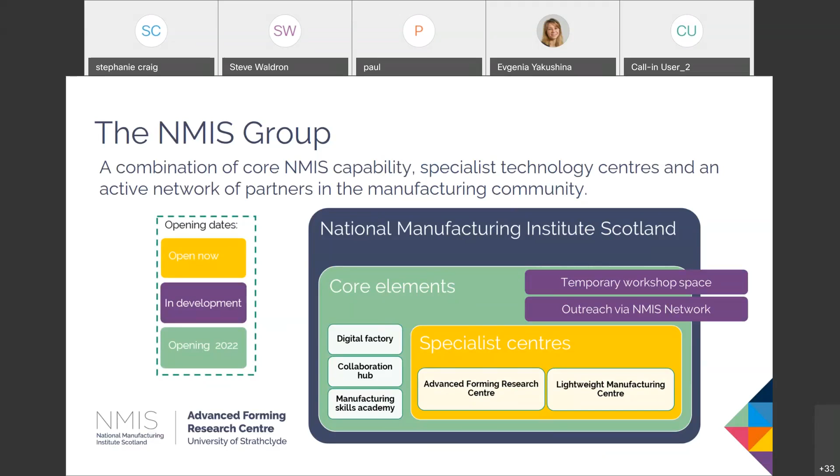In terms of the NMIS group, today you will be hearing from one of the specialist technology centres, the Advanced Forming Research Centre, which specialises in metal forming, forging and materials. There will also be other core elements of the NMIS once the building is operational in 2021/2022, including a digital factory, collaboration hub, and the Manufacturing Skills Academy. Of the specialist centres, two are already open: the aforementioned AFRC, and also the Lightweight Manufacturing Centre, specialising in lightweight materials and composites.

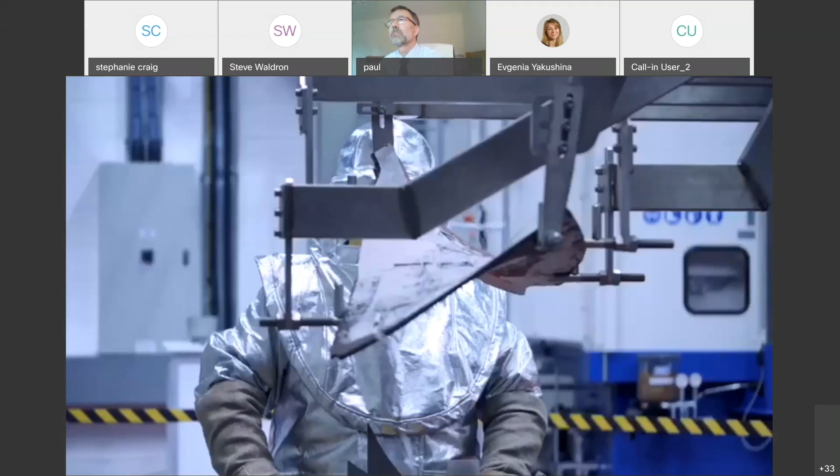Okay, thanks, Stephanie, and welcome everybody to our webinar on forming and indeed superplasticity. We thought we should start off with a bit of an introductory slide just about superplasticity itself.

So in terms of definitions, what is superplasticity? Well, it's an enhanced form of plasticity, as the name suggests, that we can obtain in certain materials deformed under some fairly closely controlled conditions. To put that into context, if you think of a reasonably ductile material like mild steel - if you took a rod of mild steel and put it into a tensile testing machine to see how far you could pull it before it broke, you would typically get somewhere between 20 to 30% extension. So that would be quite a high level of ductility.

In the case of a superplastic material, as you can see from some of the examples on the bottom right of the slide, we're actually an order of magnitude up, and we can get many hundreds of percent extension. Indeed, there may still be a world record for a bronze where they managed to get several thousand percent extension.

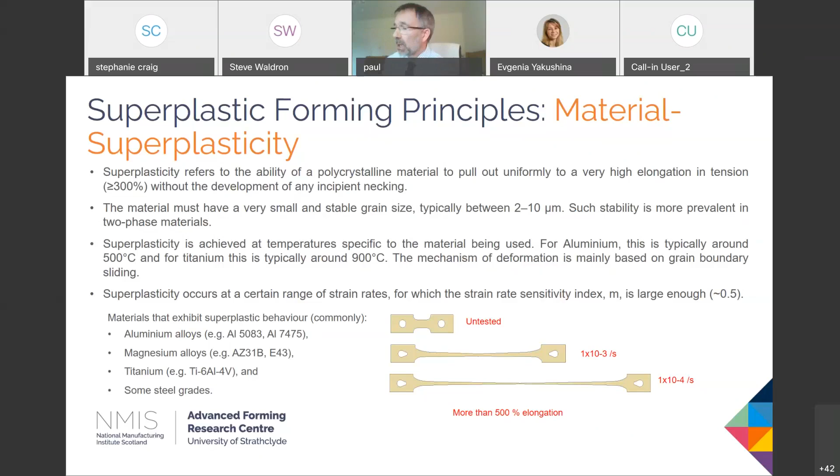If we can move to the next slide, Steph.

So the process itself, what does it involve? Well, this is a nice little set of schematics which walks you through it. To carry out a superplastic forming operation, you need to source your sheet, cut it to the appropriate size for the preform, and then the sheet is put into a press of a suitable type that has heating capability, and clamped between the tools. It's clamped so that it's gas tight, and then we form the sheet using gas pressure - in this country we'd be using argon - to blow the sheet into the shape of the tool, as demonstrated there. Now, if you've never come across superplastic forming before, this all sounds a bit unlikely - you can take a sheet of metal and blow it into shape just using gas pressure - but it is possible, and it's something we do a lot, and that is the nature of the superplastic forming operation.

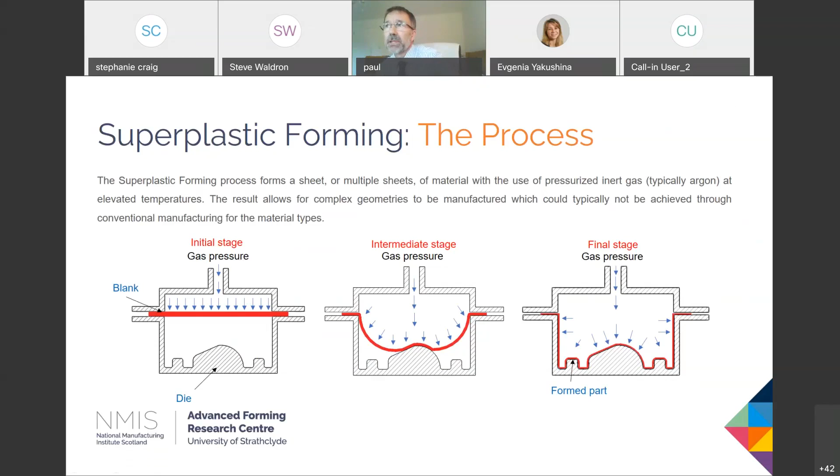Now, what we've shown you here is just a single sheet forming operation. If we jump to the next slide, there are variants of this. We can either use single sheets, or under some circumstances - this is done with titanium alloys - create parts using multiple sheets. There we take advantage of a process called diffusion bonding. So what we're showing in that bottom schematic is a 3-sheet part.

So let's say the 3 sheets of titanium 64 will have gone through a careful cleaning process to make sure the surfaces are nice and clean. Then we apply a bonding inhibitor, or more generally known as a stop-off material, that inhibits bonding in certain areas. That's important because we want those areas to later become the gas paths for when we subsequently inflate the part to form the shape you see on the right. So what we do is clean the sheets, apply the bonding inhibitor.

We then take that pack, heat it up to a fairly high temperature under mechanical pressure, and we have this process called diffusion bonding. Titanium is unusual as a metal in that it dissolves its oxide film. By holding the pack at high temperature under pressure, the material bond lines completely disappear. And if you do the process properly, you effectively end up with a monolithic piece of material.

We can then take that and put it into usually a different piece of equipment, an SPF press, and by pushing gas pressure into it, actually inflate it to give the shape you see there on the bottom right. That's called a Warren girder structure.

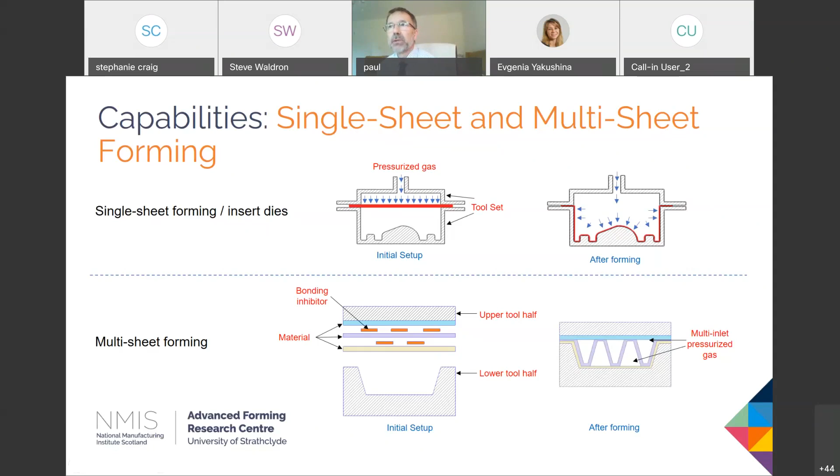Okay, so that's a little bit about the superplastic forming operation from a practical point of view. This slide attempts to sum up some of the advantages of the process. So why do we do it? Well, there are some alloys that just can't be formed cold, and titanium 64 would be a classical example of that. Its formability in a classical cold pressing operation is very limited indeed.

So using the superplastic forming process opens up a whole range of possibilities for alloys like that. But the other main advantage of the process is because the material is superplastic, it allows us to form complex near-net geometries. And the reason they are near-net is because we don't have any problems with springback.

Just in case you don't know what springback is, if you cold press a sheet, you bring the tools together, squeeze the metal into shape, and then as you pull the tools apart, the metal will spring due to its elasticity. That can be a problem, particularly with more complex parts, and it takes a little bit of designing against. It's not the easiest thing to do. In the case of superplastic forming, we don't get any springback, because essentially we're annealing the piece as we're forming it due to the relatively low forming speeds.

The second main advantage is because of this capability to form complex geometries, it can allow, under some circumstances, what may otherwise be quite complex fabricated assemblies with many separate parts to be redesigned as one part. There are many good examples, particularly from Boeing, where they've done that retrospectively, looked at part assemblies and said, actually, we can form this as just one SPF part and greatly reduce the part count. And of course, when each of those parts has needed its own tool set, the overall cost reduction can be very substantial.

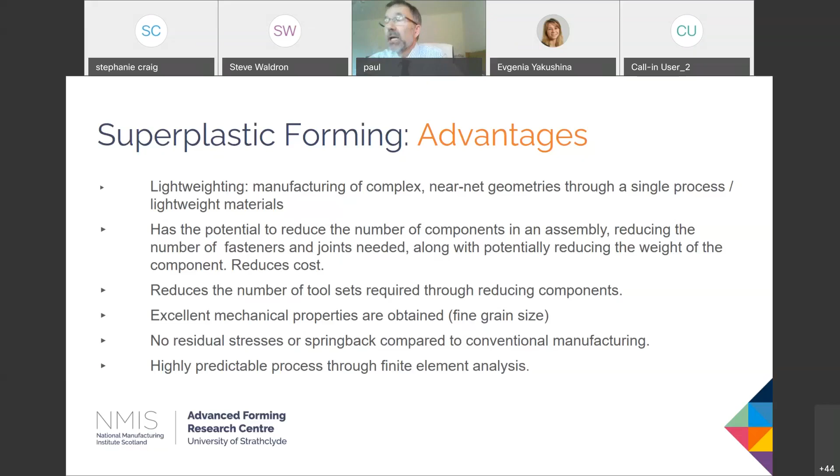Of course, it has its challenges, and any manufacturing process you care to think of will always have its challenges. The principal one is that it has reasonably long cycle times, certainly compared to many cold forming processes. For a single sheet part, typical forming times are perhaps around 30 minutes per part, but for more complex multi-sheet parts it can be several hours to manufacture. So superplastic forming is something of a niche thing, tending to be used in high value-add type applications, and we'll come to a few of those subsequently.

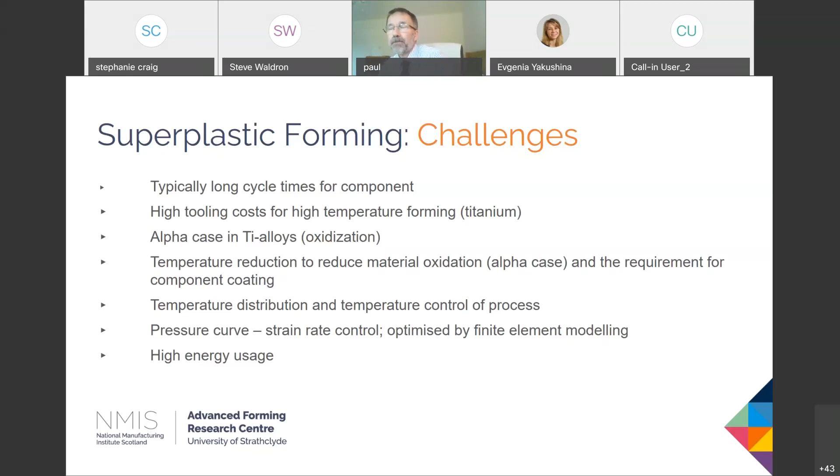If we can jump to the next slide, Steph.

One of the things we said we'd talk about was what's going on in the world of superplastic forming, what are the recent trends. The top two really relate to titanium alloys, probably the most difficult materials to form using superplastic forming in some senses. There's been a big push over the last few years to look at the use of ultrafine grain materials - classically Ti-64 processed using very careful rolling procedures to generate a grain size of less than 1 micron, very fine indeed.

Why would you bother doing that? Well, it gives you the opportunity, if interested in SPF of titanium, to either reduce the forming temperature or increase the forming rate. These are both good things, but most manufacturers would tend to want to reduce the forming temperature, because reducing it even by 50 degrees C, or better 100 degrees C - which is what these ultrafine grain materials do for you - you can greatly improve your tool life. So on a big production run, you don't need to take the tools out, clean them up, and put them back in so regularly.

So that's a big bonus. The other thing people have been looking at over the last few years - some of our colleagues at TIMET have spent a lot of time working in this area - is modifying the chemistry of titanium to reduce the SPF temperatures. We can now form a range of titanium alloys in the temperature range of 800 to 850 degrees C. A nice example would be Ti-54M.

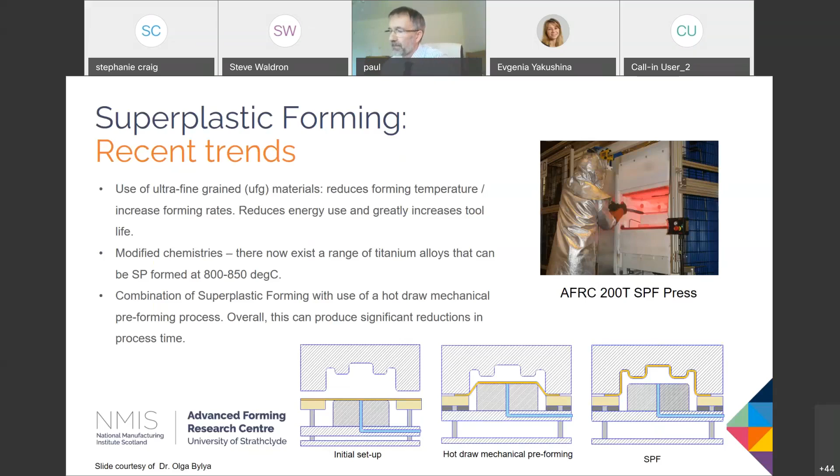If we jump to the next slide, Steph. Some applications - apologies on this slide, because we would have liked to show you lots of nice pictures of all these parts. Unfortunately, copyright rules don't allow us to pull pictures off websites and put them where we wish. But I'd draw your attention to the references at the bottom that will show you some very nice pictures of all these parts.

Aerospace - engines, I've already mentioned fan blades, the big blades right at the very front of the engine. They've long been made by companies like Rolls-Royce using superplastic forming, an SPF-DB process, because those are diffusion bonded as well. Guide vanes and various tanks are all made by superplastic forming, and indeed tanks for satellite launch vehicles have also been made by SPF in the past. On the actual aircraft itself, you see a range of examples there.

SPF is often used to make door panels of one type or another, simply because it gives you the opportunity to form what is otherwise a difficult-to-form material with the sort of detail required. A nice example at the bottom - slightly old one, I'll concede, back to 1991 - but it does give you an example of what can be done when you use the process properly.

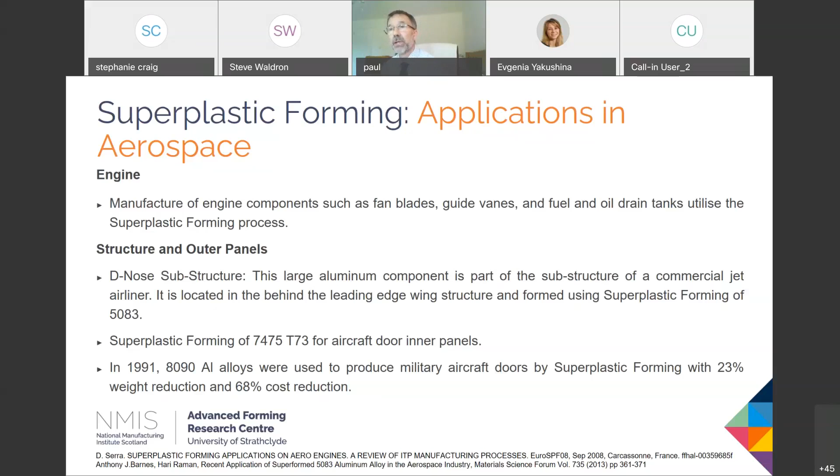8090 is an aluminium lithium alloy used to make a military aircraft door with a very significant weight saving, and a 68% cost reduction. So if you design for use with this process, you can really take advantage of it, and it needs to be done that way in order to get those sort of cost savings.

Moving to the next slide, some applications in automotive, mainly aluminium for automotive, and you see reference to companies like Superform and Alcoa there. The sort of cars this is used on, Bentley Continental GT, Mercedes AMG SLS, these are obviously top-end cars. What you see is that a lot of the external panels are made in aluminium using the SPF process.

Again, an example at the bottom there, just of a prototype where, using suitable design, you can end up using one part instead of three, which would be necessary using a conventional forming technique. There are secondary advantages if you design for SPF, reducing your part count, because normally a fabricated assembly will be riveted or welded together, and rivets and weld lines are areas where failures can occur, which are completely alleviated if you use a single part.

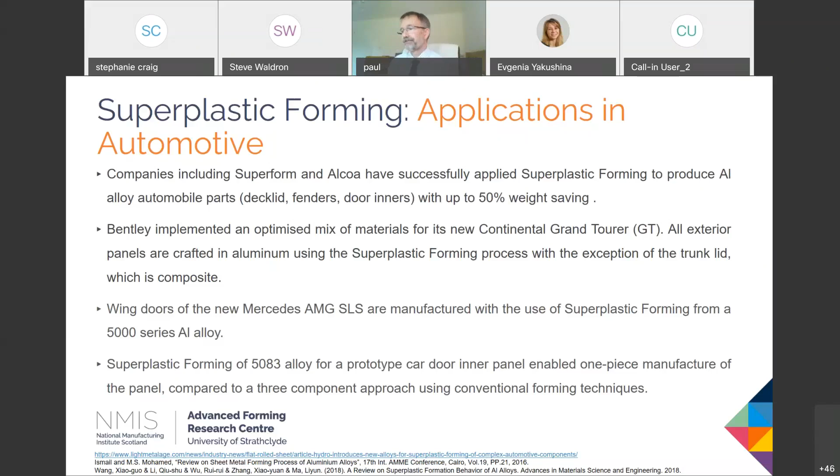Jump to the next slide, Steph. So this is the final one from me, and it tells a little bit about the story of the AFRC specifically, in terms of what we've done and where we are with the process.

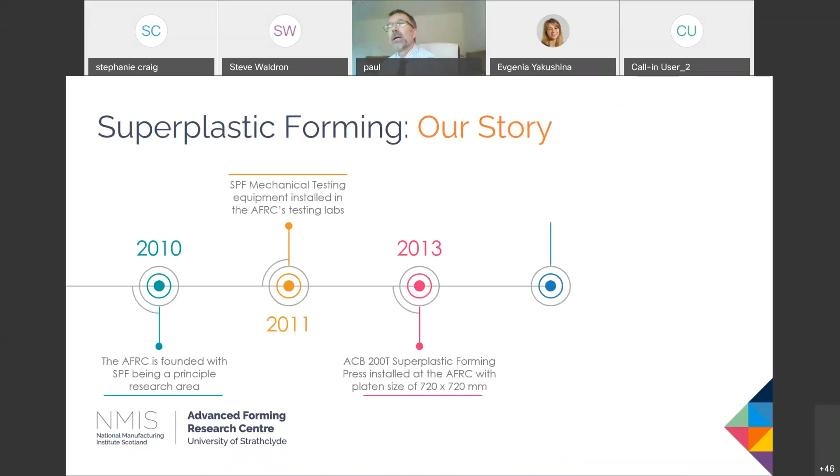We moved into our present building back in 2010. We're situated right next to Glasgow Airport, for those who aren't familiar with us. We very rapidly established an extensive set of mechanical testing equipment, so we can characterize the materials we're talking about here very fully. We also back that up with a very full set of metallography capability as well.

This is common to many universities, but what you wouldn't find in many universities is what we then acquired in 2013 and 2014. Initially a 200-ton press from ACB, a French company based in Nantes. Then the year after, the press you saw briefly in the video earlier on, a 1,200-ton Superplastic Forming press, with a platen size of 2.4 by 2 meters.

As far as I know, that is the biggest SPF press of any research establishment in the world. There may be one close to it in China. In fact, it's one of the biggest SPF presses in the UK, either inside or outside of a university. I'm aware that BAE Systems have got a slightly larger SPF press, but it certainly is a very substantial size press. So the point about this is we can do full scale forming operations.

Final point, in 2020 we had a bit of a think about the number of projects we've done over the years. We've worked with a whole range of customers on Superplasticity, both looking at it from a fundamental point of view and from a much more practical point of view. And we reckon over the years, we've done about £10 million worth of work across a whole range of projects.

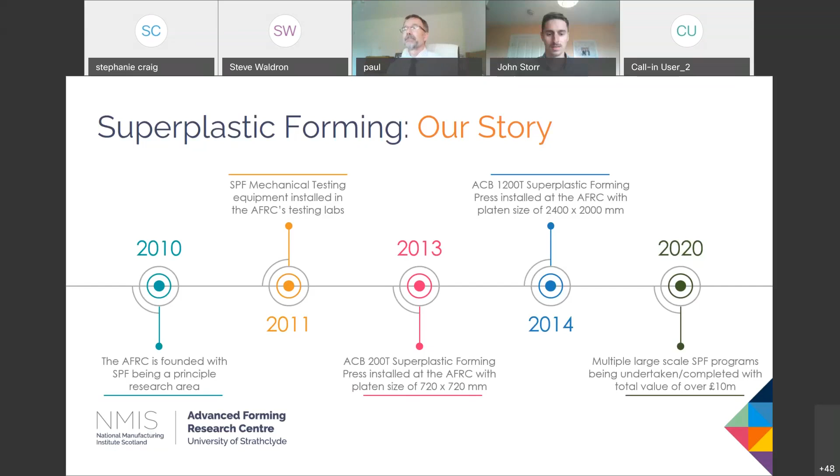Okay, thank you very much, Paul, and thanks for all your insights into the SPF process there. So where Paul has spoken a lot about the principles of the process, the capabilities, the advantages and challenges of SPF as a whole, I'm going to talk a little bit more about superplastic forming at the Advanced Forming Research Centre, what capabilities we have, how we benefit our customers, and some of the publications and work we've done in the past. Paul spoke a lot about the introduction of SPF, and left us with a slide on how the AFRC's story has been so far.

I'm going to just briefly go through some of our capabilities in-house. As Paul mentioned, one of the benefits we really have in SPF is the full-scale manufacturing equipment that you maybe wouldn't typically find in a university environment or a research centre in particular. The first piece of SPF full-scale equipment we received in the centre was our 200-ton superplastic forming press. As Paul mentioned, this is an ACB press.

This was installed in 2013. It has a platen size around 720 by 720 millimeters, and it's used typically to prove out process cycles, to look at new material implementation, and to look at different material structures and geometries that we want to investigate with different pressure cycles before we perhaps move on to apply those to the larger press that we have.

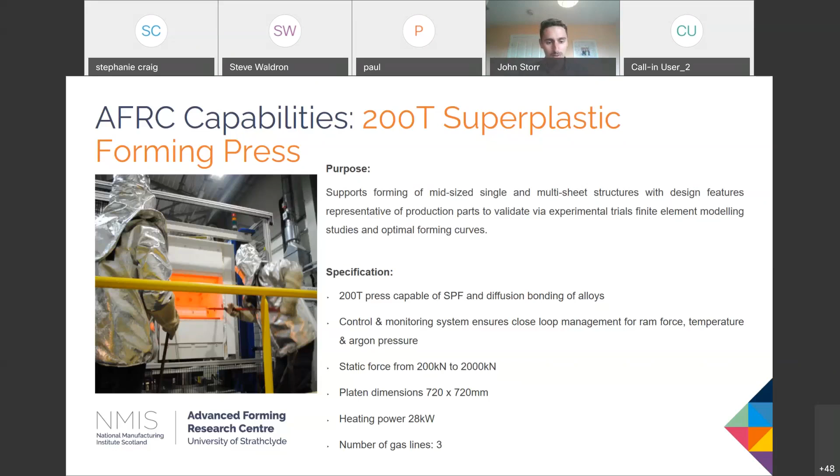We have our 1,200 ton superplastic forming press, which also has a unique capability of creep forming. Along with the 1,200 ton SPF capability, it also has 600 ton of creep forming capability. So not only using gas pressure to form components, but we can also just use the tonnage within the press to creep form thicker sheet components. We've done that with some thicker sheet titanium components in the past as well.

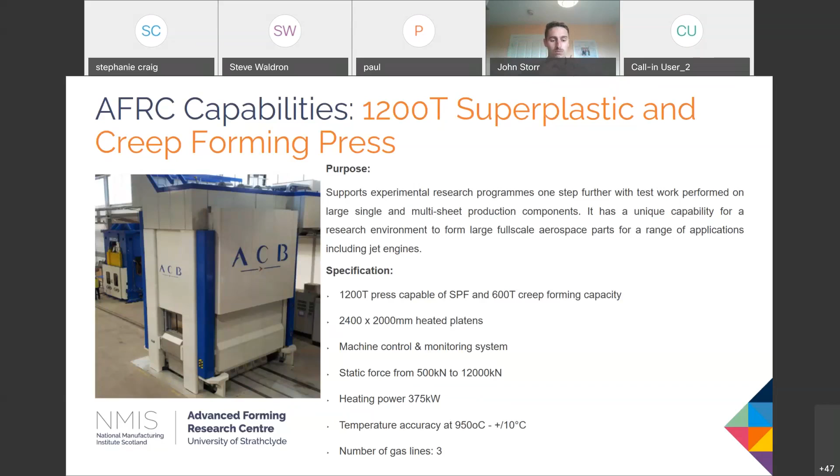Compared to the 200 ton press where we had a platen size of around 720 millimeters, we've got a significantly larger heated platen area in this press of 2.4 by 2 meters. That allows us to work directly with our customers on full-scale manufacturing components, allowing them to carry out research on our presses without having to take their own presses offline, which is a huge benefit. They don't lose production time, and we can apply directly to prove out the process we want to investigate on full-scale equipment, which is really essential for what we want to prove.

As well as the larger scale pieces of equipment, we have a number of complementary pieces of equipment. We have our automated die part interface testing machine, a unique machine purposefully made for the AFRC. What we're trying to do is replicate die wear activities on a very small scale using small coupon samples. It's automated so that multiple parts can be run to simulate a process as would be done in a manufacturing setting, allowing us to assess things like die wear, tool material, lubricants and coatings, so we can understand if a novel lubricant, coating, or die material would be suitable for the process.

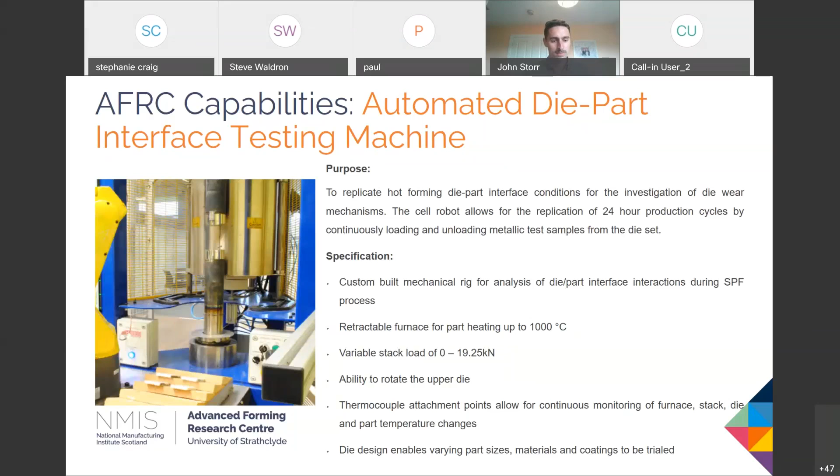Another key complementary process is our mechanical testing. One aspect is our Zwick Z150 machine, which has a similar setup to the die part interface rig I just described. You have a furnace wrapped around a die stack, and the die stack is used specifically to hold a tensile component.

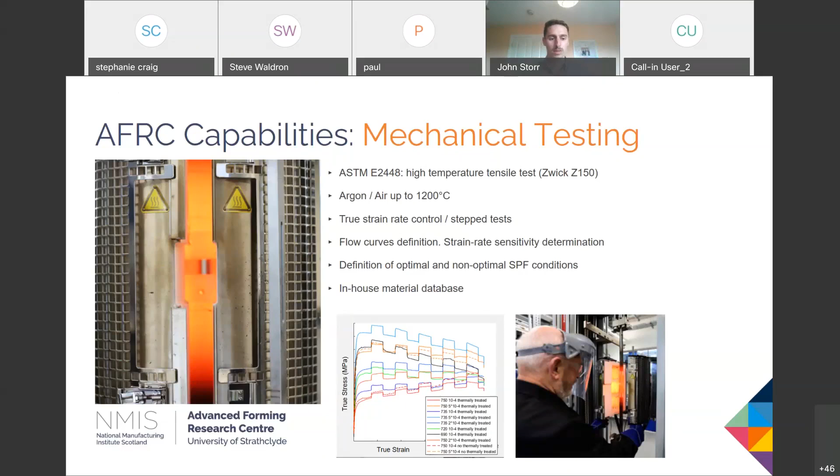And that lets us essentially feed into some of the process modelling activity that we run for superplastic forming, which I'll talk a little bit about further on in the presentation.

If you go to the next slide. So this slide is going to talk through the AFRC's capabilities and our specific expertise, what we offer in the area of superplastic forming, and some examples of work activity that we've done in the past.

The key thing I want to highlight is that we don't just focus on the SPF process. We have some complementary processes, but rather than just focusing on SPF itself, we focus on the entire process chain involved with SPF - that's pre-processing as well as post-processing activities. So we have a multitude of capabilities in the entire area of SPF that we can use to benefit our customers.

Some examples of this: we've done a lot of work in new product development for SPF. This might involve looking at a component which was previously manufactured from a different method, analysing how suitable it would be for SPF, developing process cycles, and carrying out tests on our manufacturing equipment to understand how SPF could benefit and develop that component.

Or perhaps looking at a new line of components within a family - for example increasing the size of a component, understanding how that was influenced by the SPF process, and understanding how that would work for our customers.

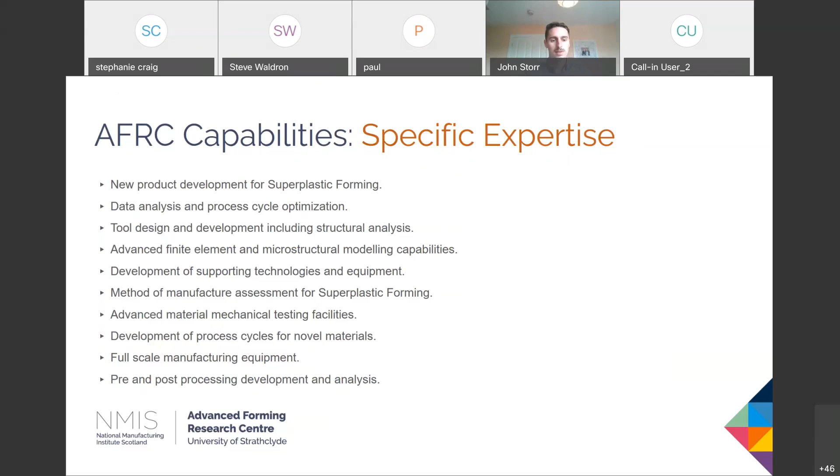So one thing I've spoken a bit about in some detail is our modelling and simulation capabilities. We have, as I mentioned, the capability to characterize material and then analyze this using commercial software, which we have access to a number of commercial softwares, including Abaqus and PAM-STAMP.

We have a close liaison understanding of the testing outcomes to be able to apply them, and we have then a specific team involved with actually developing these finite element models based on the tensile test data, the manufacturing parameters and capabilities that both we have and our customers have, to truly understand the capabilities and develop a very accurate process cycle.

Or things like very accurate temperature range that we want to aim for, and specific strain rate that we want to aim for, to ensure that when we do move on to the machines, that we can hopefully have a part that is formed correctly in the first instance.

We also look at microstructure analysis and trying to understand how the microstructure behaves during the process, and our modelling capability will allow us to predict some of that microstructure.

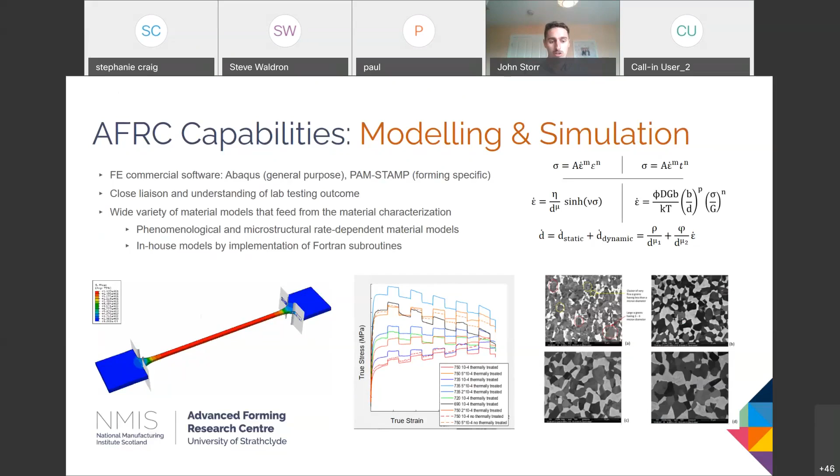Just moving on from this a little bit more and just showing some examples of the processes that we've used, and this is looking at a multi-sheet component and a single sheet component, so showing what our modelling may predict.

And really, as I said, it's an iterative process. We need to make sure that we develop the FE model based on the material characterization, based on the machine parameters, and then transfer that to the press, form real life components, and then bring that back after analysis and understand what developments and improvements that can be made to optimize that cycle.

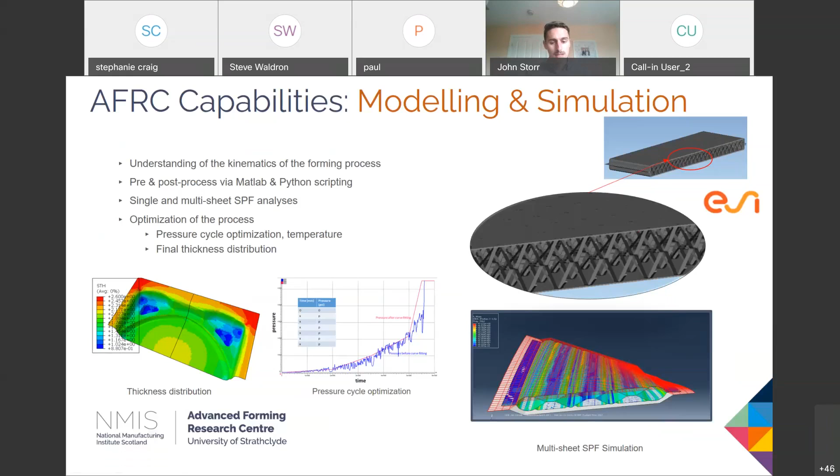Thank you. So now that I've talked about the capabilities that AFRC have, I want to give some specific examples of case studies. So we've got 3 case studies that I'll talk about in a bit of detail, and before we move on to our Q&A session.

So a case study that we have, and this is a bit of an older case study from when we first started looking into SPF, and we wanted to understand how we could perhaps look at reverse engineering a component in order to understand and drive a specific forming cycle and pressure curve from that.

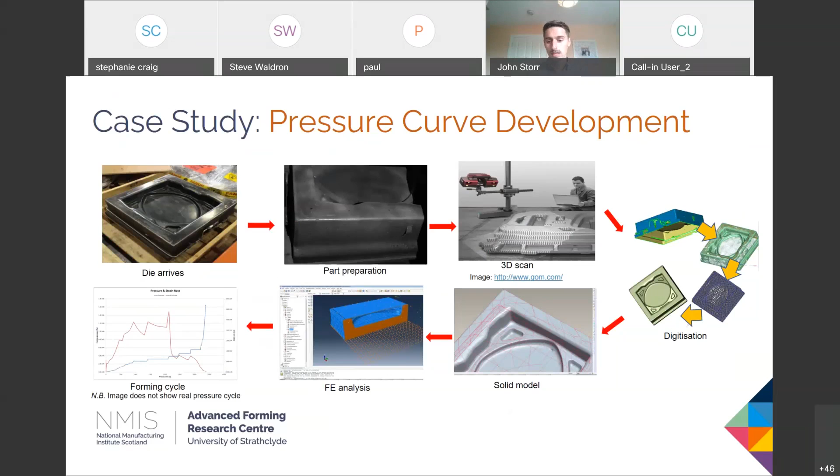This gives us our pressure curves and our tonnage requirements for the SPF process. It's just an example of how we can look at perhaps historic components which we don't have digital data for, and how we can develop those into usable information for superplastic forming. I'd like to move on to the next slide, please, Steph.

So one of the significant case studies that I'd like to talk about is an example from a Rolls-Royce program that we completed a couple of years ago now. As Paul mentioned, Rolls-Royce develop and manufacture fan blades along with the entire engine.

And the fan blades are historically superplastically formed using a Warren girder structure on the inside with multiple sheets of material. Rolls-Royce have been making fan blades in this manner for 30, 40 years, and they came to us to understand if we could try and optimize their process cycle in order to increase the volumes they were able to produce, rather than having to invest in machinery to try and increase that throughput.

What we did as the centre was we carried out an extensive data mining activity on many, many years of Rolls-Royce manufacturing data, and we were implemented quite specifically within the Rolls-Royce facility. So we would spend a significant amount of time with the engineers at the Rolls-Royce facilities, the technicians who use the press, to try and understand where there are challenges in the process, and where we might be able to overcome some of these challenges and optimize that process cycle.

And it wasn't just on the specific process cycle of the SPF part, it was on some of the pre and post processes and complementary activities that we've spoken about as well. We took that data, we understood that data, and it allowed us to analyse varying sections of the SPF cycle, doing things like interrupted tests and cycles to try and understand our manufacturing capabilities on real life components, and what stages of the cycle we could perhaps optimise further.

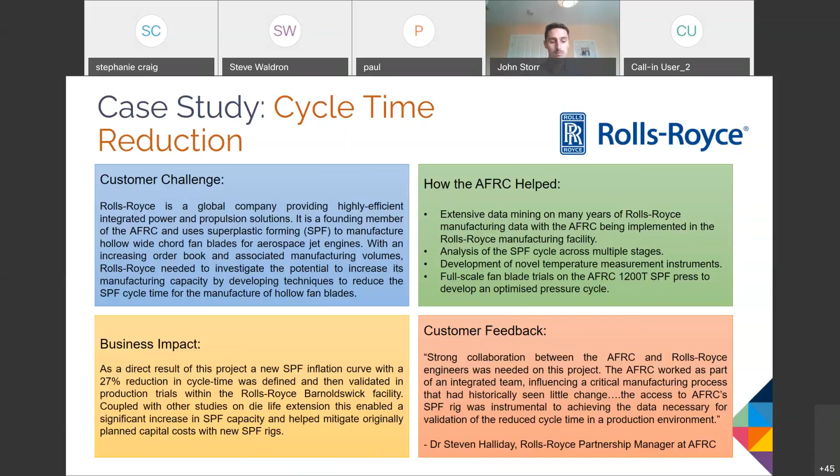The quote he's left us here is that strong collaboration between the AFRC and Rolls-Royce engineers was needed on this project. We really embedded ourselves throughout the facility at Rolls-Royce, working together as part of an integrated team, influencing a critical manufacturing process that had historically seen little change, and allowed the SPF rigs to be implemented to achieve the data necessary for validation of the cycle time reduction in that production environment. A really successful project example for us, and an interesting program to work on over multiple years, embedding ourselves within this manufacturing process, which has led to multiple projects throughout the years also.

Another example with Rolls-Royce, this time a complementary process. I mentioned coatings and lubricants used for the SPF process. Specifically, the lubricant boron nitride is sprayed as an applicator to a component prior to the manufacturing process, acting as both an oxygen inhibitor and preventing sticking to the die, allowing easier removal of components at the end. This is typically sprayed manually onto parts, but that variation can lead to thickness coating variation, causing issues like sticking to the part if too much is sprayed, or alpha case and oxidization if there isn't enough coating on the component. So we are trying to understand how we could minimize that variation through an automated method.

We worked in collaboration with Rolls-Royce to develop and demonstrate an automated method for application of boron nitride to Trent 700 fan blades. We installed an automated spray system at the AFRC using robotics, and demonstrated trials through spray coating fan blades, which were then formed in our 1200-ton press, along with analysis of coating thickness and the consistency we were able to achieve. The business impact of the investigation and demonstration helped reaffirm the business case to install similar spray coating systems within Rolls-Royce manufacturing facilities, which has now been undertaken, and they are installed within those facilities.

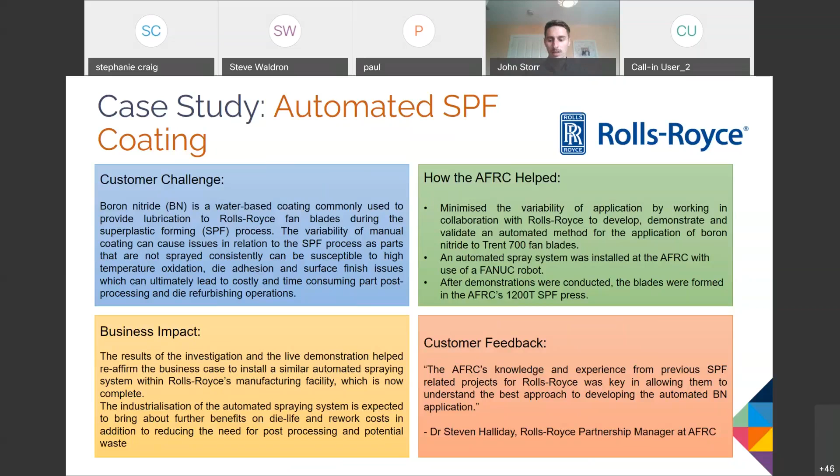That's everything from myself. Thank you everyone for listening. I understand it was probably a lot of information to go through in a fairly short space of time, so at this time we would really like to welcome any questions from everyone here. Thank you.